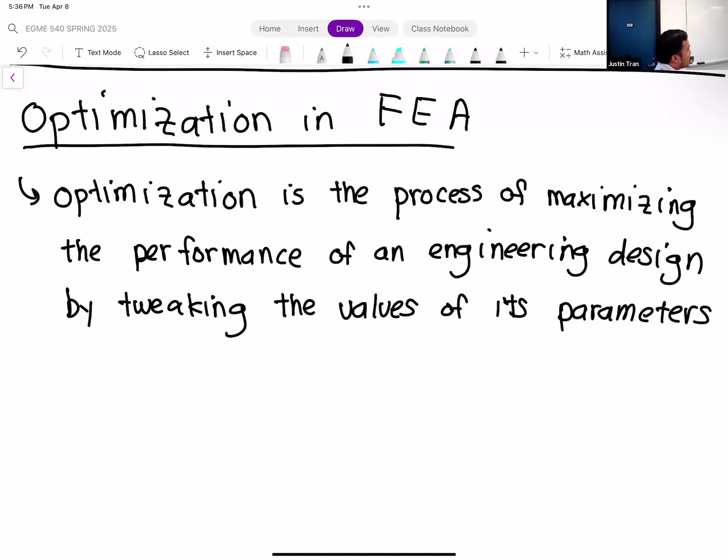Okay, so whenever you have an engineering design, there are lots of different parameters that go into that design itself. For instance, let's look at a building. Whenever you're designing a solid part, the first thing that comes to mind are the dimensions of the part itself: we have the height, the width, and the depth. So that's three parameters that define the geometry of our design.

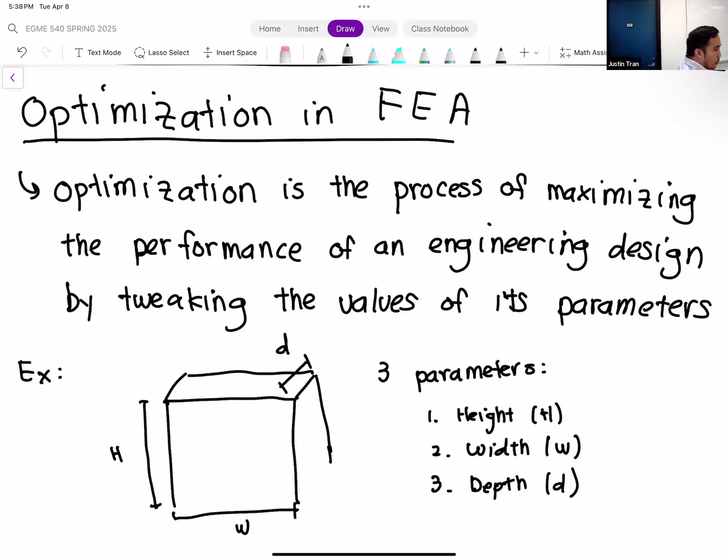Depending on what we specify for those parameters, that's going to change our engineering design. Let's say for this building you want to minimize the amount of air resistance or drag the building experiences in a windstorm. That output, or that aspect of performance, is going to be sensitive to our design parameters. If we're interested in minimizing the drag, or minimizing the energy cost of the building, we would think about changing these three parameters.

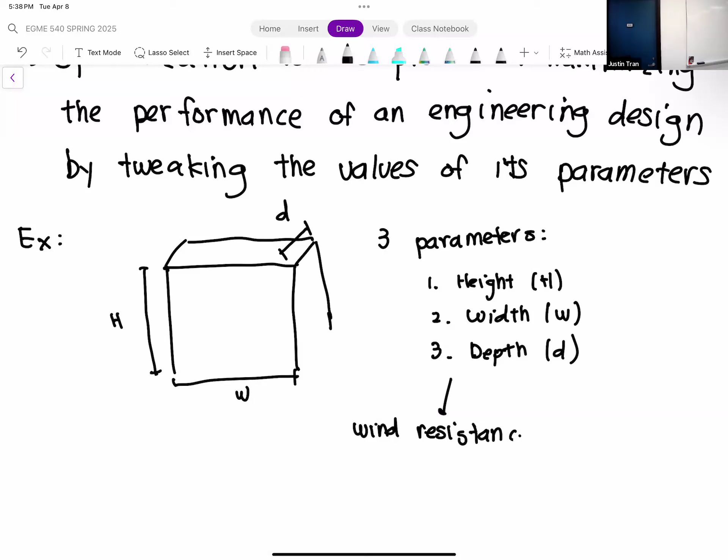So we can tweak the values of these parameters, or change their values, and that's going to change how our design behaves, what the outputs of our analysis are going to be. Another example, one that's a bit more close to home, something we've all done in this class—let's look back at activity 3.

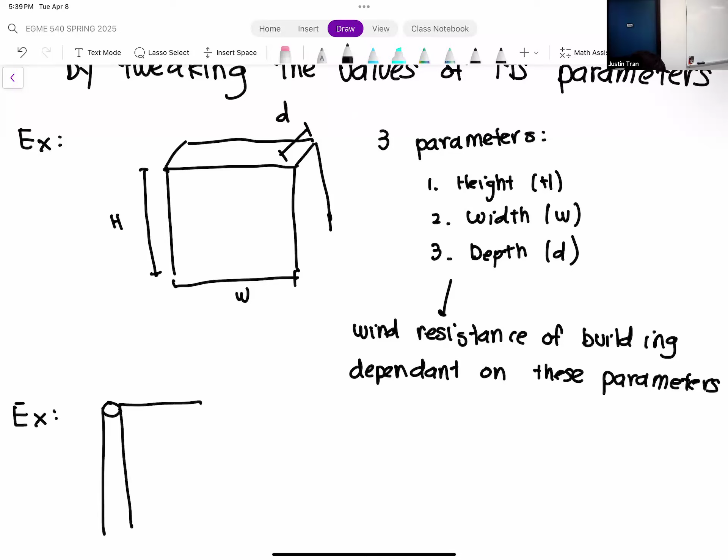In activity 3, we actually did a little bit of a design exercise. If you recall, that was our signpost activity—we had our signposts like this. Part of that activity, I had you modify the diameter of the post so that the stress in the post was minimized, or we tried to get it below the yield strength of the material.

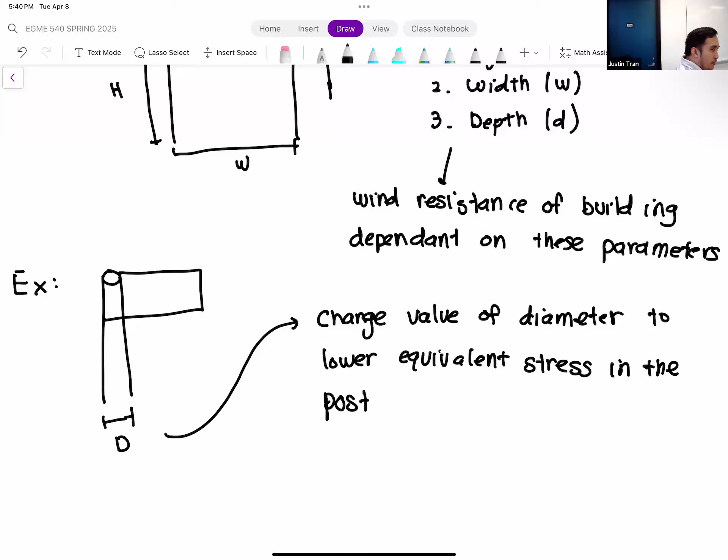Okay, so that's another example of an aspect of our design's performance being sensitive to these parameters. And of course, these are not the only examples. Any engineering design you have, the result or performance or inefficiencies are going to be sensitive to these parameters. A big part of engineering design is how we select these parameters in a way that maximizes performance, minimizes loss, maximizes the factor of safety, things like that. No matter what engineering design you do, that's going to be part of the process at some point.

Now, we haven't really put much thought into how we do this so far in this class. Whenever there's a design aspect to an ANSYS activity, I tell you to just do trial and error: change the parameter, run the simulation, see how it changes things, go back and do it again. Turns out there's a much more intelligent, more efficient way to do these kinds of things, and that's to utilize what's called optimization.

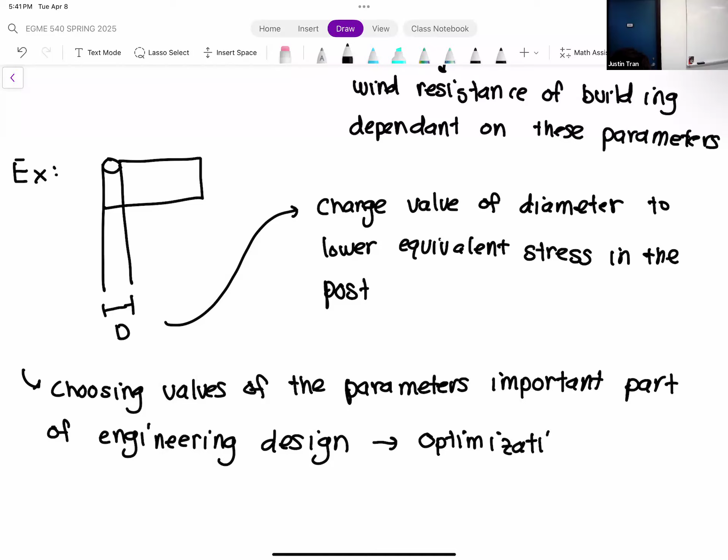The nice thing about optimization is that, for the most part, once you set it up, it's not something you have to babysit or input things into—it's a fully automated process. So optimization essentially automates the process of choosing the values of these design variables or parameters, and choosing the best possible values for them for your design.

So you can see, it's a very powerful tool, and it's one that's utilized in a lot of different settings to get good results. It's especially useful in situations when you have multiple design variables that all interact with each other in very complex ways.

If you look at the signpost example, you could probably design it without optimization because there's only one variable. But what if you have 3 design variables, maybe 4, 5, 6, 7? It becomes a lot more complicated because when you change one variable, it changes the performance of the others in a non-linear way. So for situations with multiple design variables, you need to use optimization to choose their values in an intelligent way.

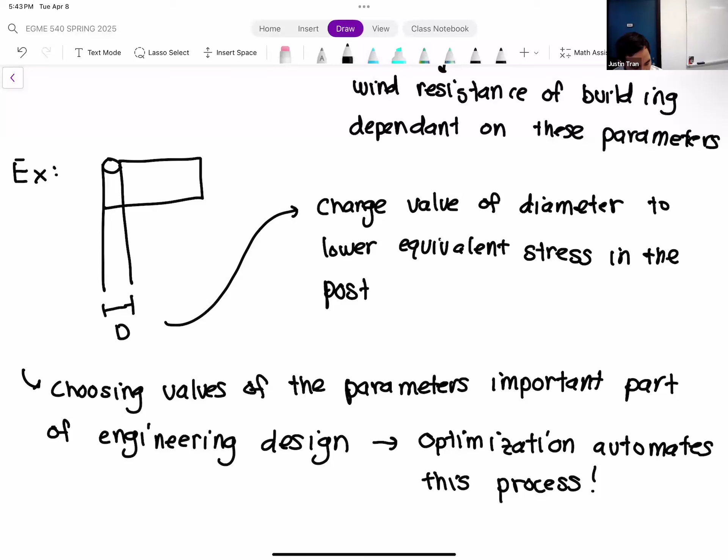So that's the objective, the goal of using optimization: to take this issue of choosing the values of these parameters and do so in an automated, systematic way that utilizes our computer to the fullest.

Any questions on this? Okay.

So let's go over a bit about how optimization works. We're not going to get into the algorithms because that's kind of a whole other class—people who took 454 with me last semester will tell you. But there is some prerequisite information you need to know to at least set it up. So let's go over some of the basics of optimization.

The interesting thing about optimization is that we introduced it in this class as an engineering tool, but optimization doesn't even have its roots within engineering. It's actually an applied math thing. You could argue that engineering is just applied math, and I wouldn't disagree, but specifically optimization started as a math concept before engineers adopted it. In fact, optimization originally didn't have anything to do with anything physical at all.

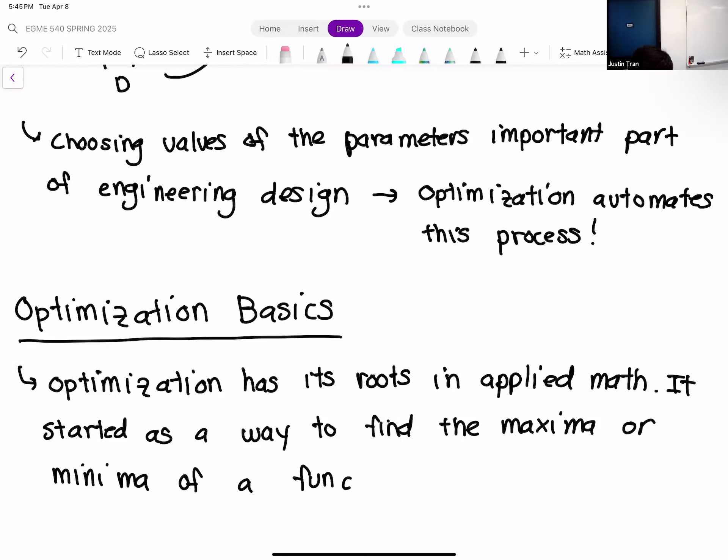So if you have some kind of function—let's say a function of t, with horizontal axis t and vertical axis f of t—if you have a function that looks something like this...

Optimization started as a way of, if you have just any kind of generic function, figuring out first where the maximum is going to be, and what the value of the function at the maximum is going to be. The maximum of this function—you can see the highest value the function attains is at this peak right here.

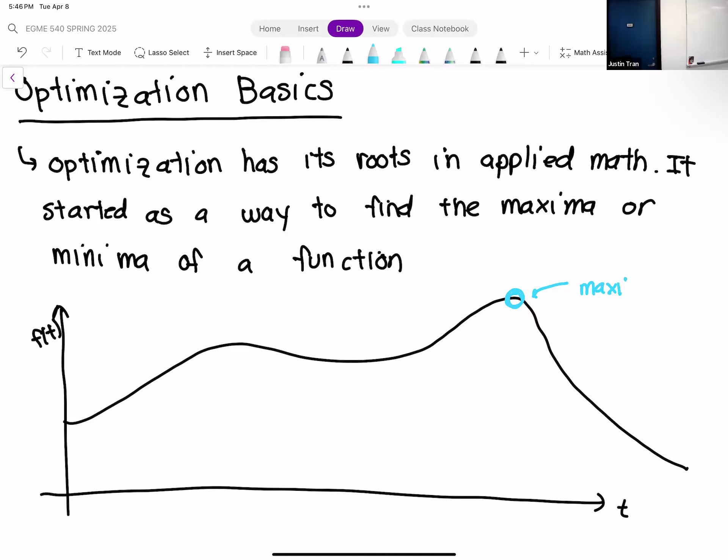And the value of t where the function attains this maxima is right here. So we often call this t optimal.

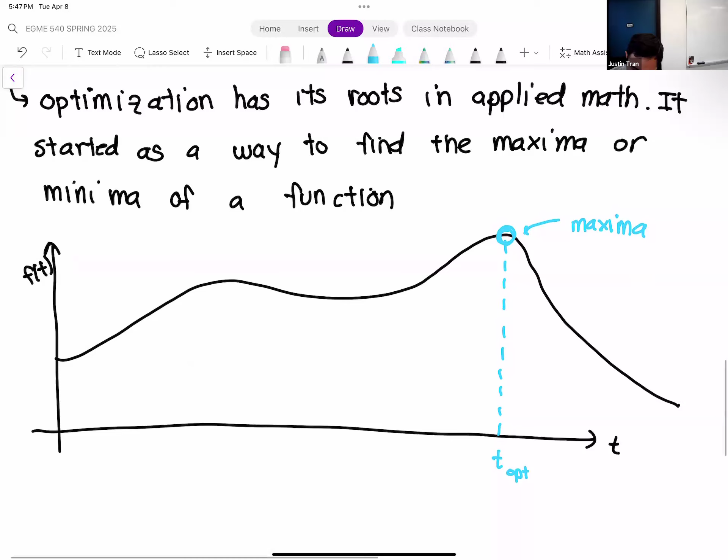So that's how it kind of started. Basically, mathematical algorithms are strategies or ways to take a function and find its maxima in a guaranteed way. Now for a 1D function, it seems kind of silly—for this function here, we found the maxima without needing any fancy algorithm.

But again, when you have multiple variables—let's say a function of 3, 4, or 5 variables—at that point it becomes impossible to plot because you have so many degrees of freedom. In those situations, you need some kind of algorithm to find the maximum.

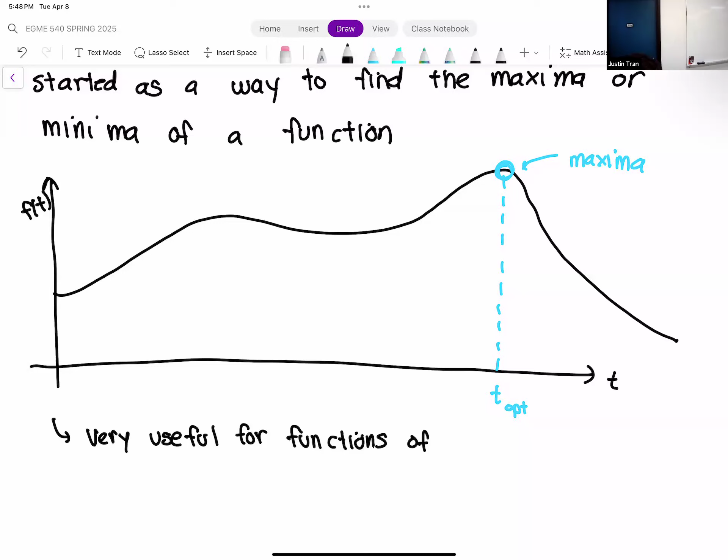As is the case with engineering designs as well. When you have engineering designs that depend on multiple parameters at the same time, finding all of their optimal values simultaneously is challenging without optimization.

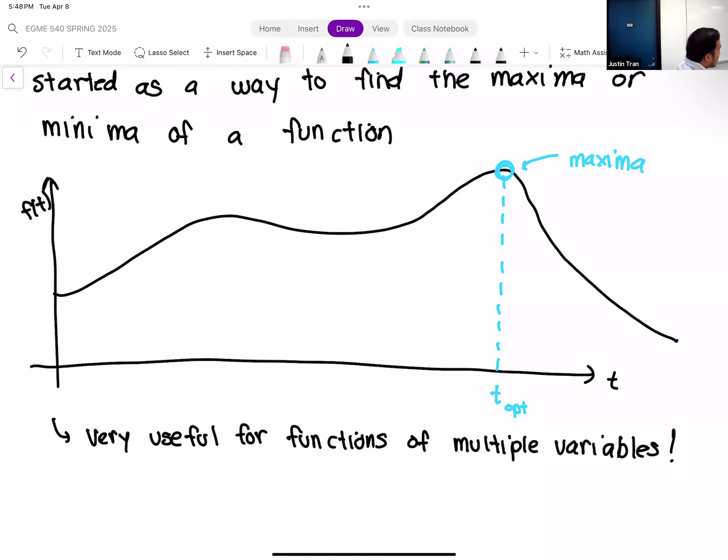Okay, so let's break this apart. Let's define some terminology here based on this simple example that we have.

So the first term that's important to understand with optimization is this idea of a design variable. A design variable is some parameter of your system—of your engineering system, of your mathematical function—that will influence the output or influence the performance of the system in some tangible way.

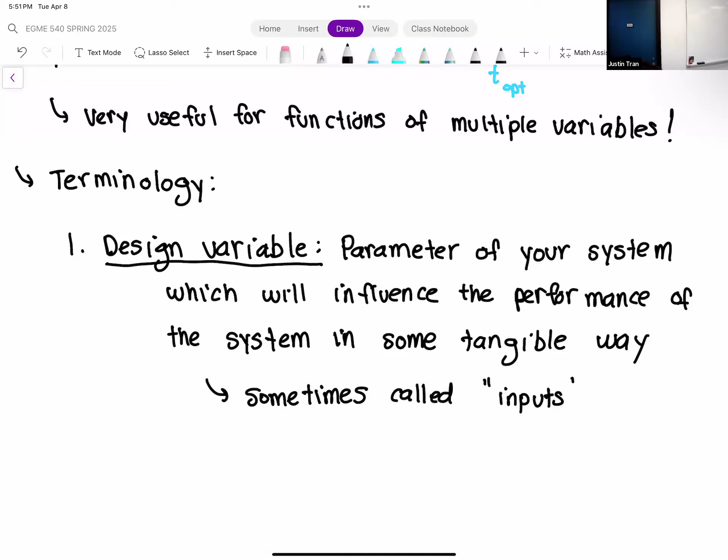Now, if you look at the mathematical literature behind optimization, oftentimes the design variables are called inputs to your system. But in an engineering context, we're often talking about engineering designs, so I like to call them design variables.

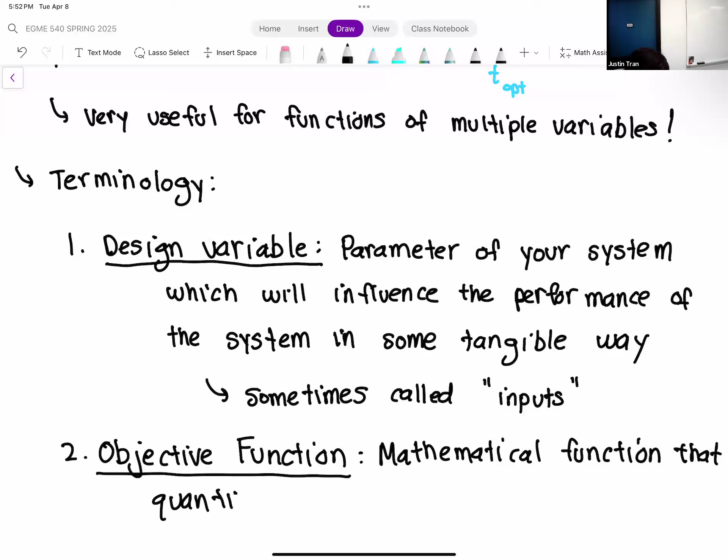Second term that's important to know is what's called the objective function. The objective function is a mathematical way for us to quantify the performance of a given engineering design. Basically, we have to have a way to definitively and systematically state whether one design is more superior than another. And the way that we do that is by computing the objective function.

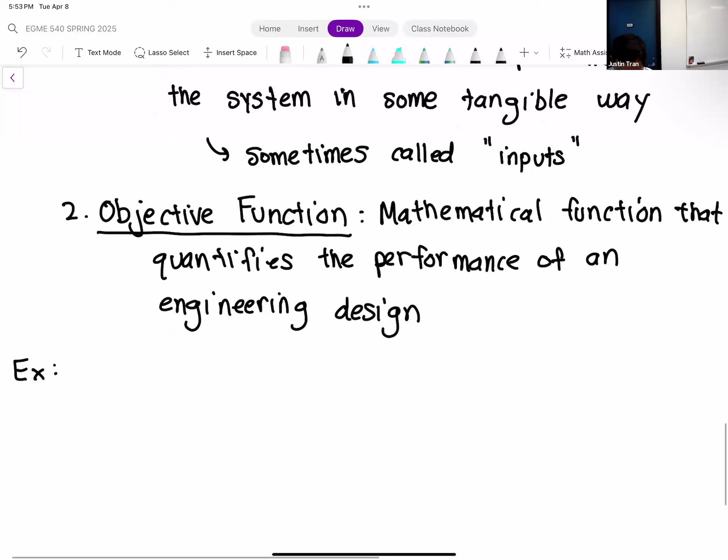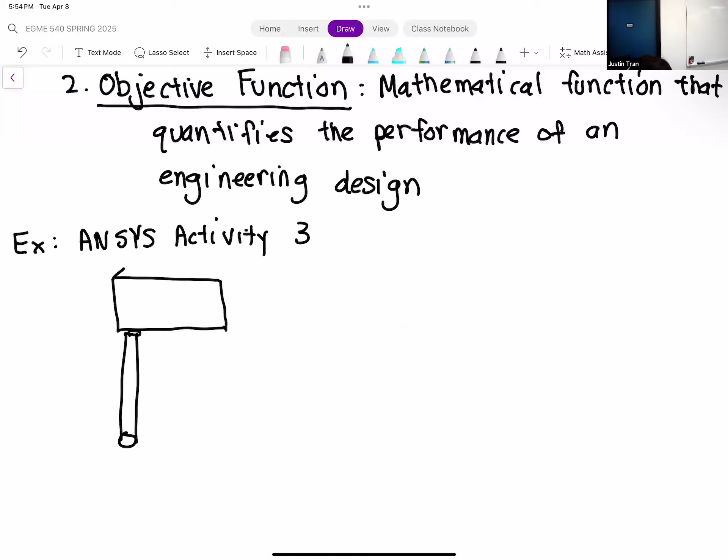Let's do an example here just to illustrate these concepts. Let's once again look at our signpost activity from activity 3. Let me go ahead and draw it again - a little bit of a better drawing of the signpost, although it's a little bit wonky in this case. Part of activity 3 is that I tasked you with choosing an optimal value, or modifying the signpost, so that the equivalent stress in the post falls below a certain factor of safety.

So essentially that was our design problem that we were looking to solve in activity 3. Right away, we can see that we have our design variable here - the variable or the aspect of our design, the parameter of our design that we can change, that we can tweak to affect its performance, is the diameter of the post. So our diameter here, that's going to be our design variable. It's just one in this case, but we can have more design variables, of course.

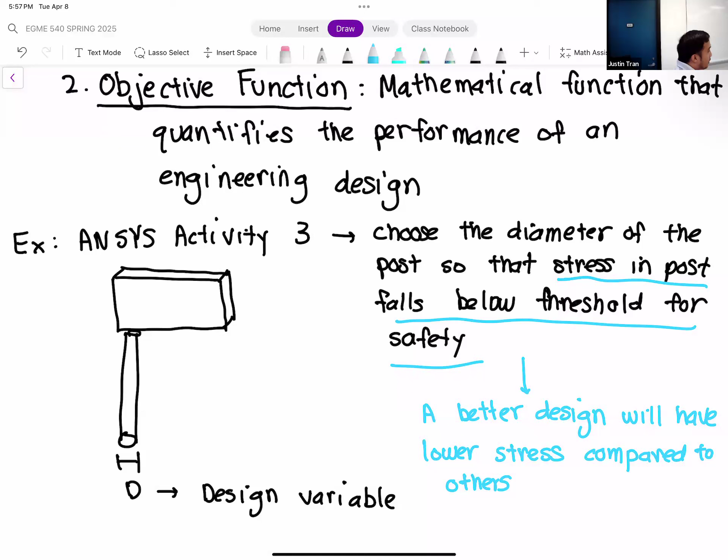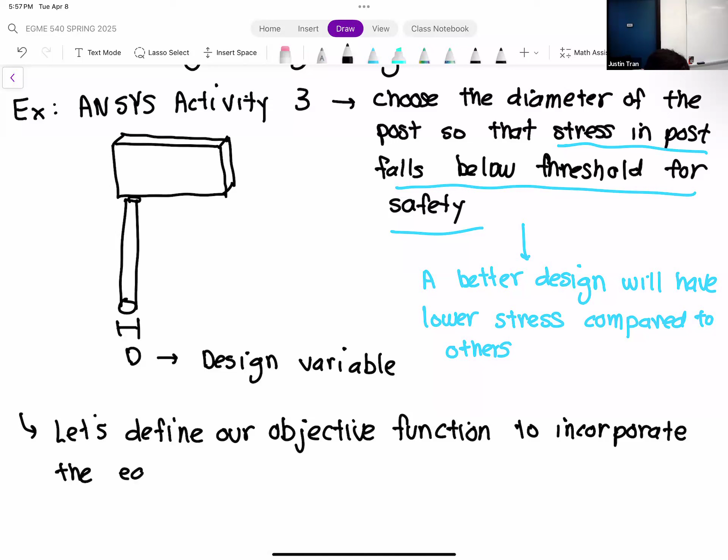And so if we're comparing two designs head to head, the design that has a lower equivalent stress in the post compared to the other one, that's going to be the more superior design. Our objective function basically needs to reflect this. So one way that we can design our objective function is to incorporate that equivalent stress directly into our objective. If equivalent stress is the criteria that we're going to use to quantify or rate our designs as better or worse, then that factor should be in our objective function.

So our objective function, let me give it the very distinct symbol F - I know we use F for a lot of things in engineering. Our objective function here, in this case, is going to be a function of the post diameter. This is going to be equal to minus the equivalent stress. Let me just give it a symbol - minus sigma von Mises, where sigma von Mises here, this is our equivalent stress.

What we can basically say is that the performance of our design is inversely proportional to the equivalent stress of the structure. So basically, the higher the equivalent stress, the more negative this function is going to be. That means the worse design it's going to be.

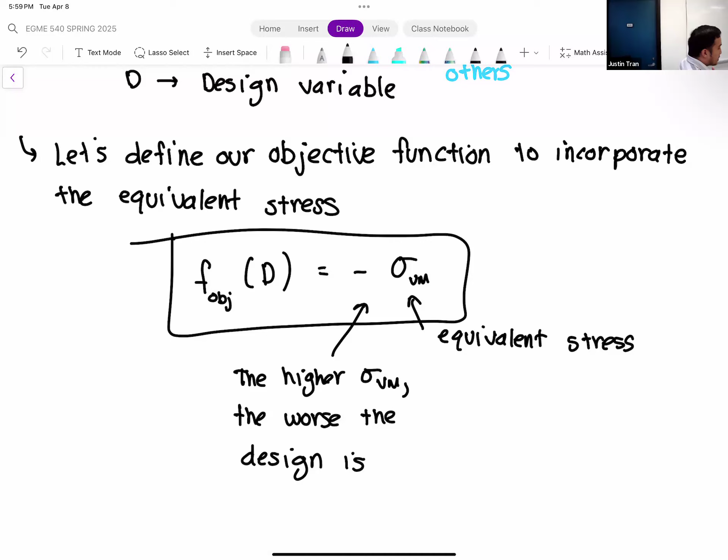So if we want to maximize the performance or maximize the objective function of our design, we want to minimize the equivalent stress. Okay. Now, this is not the only definition for the objective function that works. The definition of the objective function is usually something that you can change and modify. Another way to get a very similar result is if we define our objective function to be 1 divided by the equivalent stress. So that would also give the same result.

So if you have a lower equivalent stress, that's going to lead to a higher value of the objective function. So you want to maximize that as much as possible. Okay. So the objective function for any given problem is not unique. In fact, modifying it and tweaking it in certain ways will give you certain results better than others. Okay, so that's the idea.

And so for any given optimization problem or any given design problem, you first need to identify what your design variables are going to be. So what are the aspects of your design that you can actually change to affect the results? And then the second thing you need to think about is, how am I going to quantify the performance of my design? So what factors or what quantities are going to go into my objective?

All right, any questions on this? Okay, good.

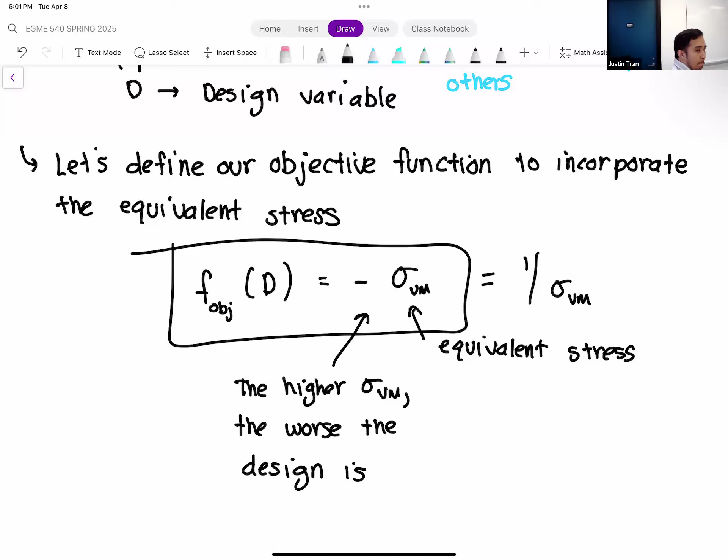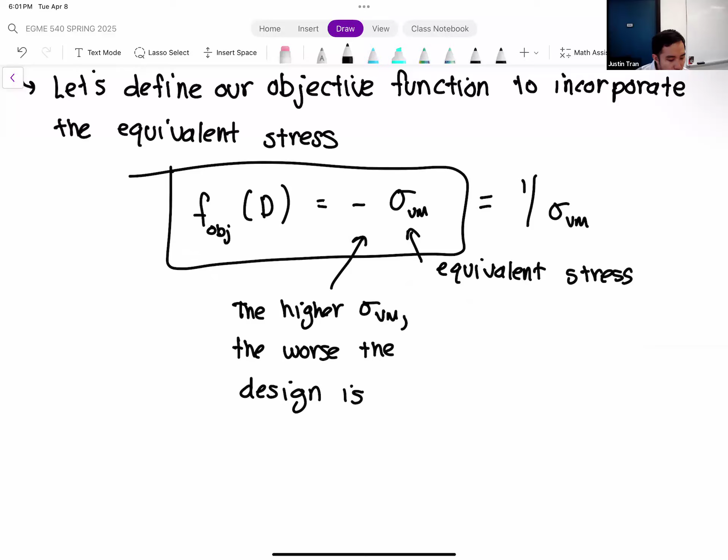All right. So that's just a very basic example of how to take a design problem and put it in terms of the optimization terminology. Okay, let's talk about the objective function a bit more, because that definitely warrants some further discussion. So like I mentioned above, the objective function is your way to quantify what constitutes a good design versus a bad design.

So when you're forming your objective function, you need to think about what are the most important aspects of my design that are going to make it into the objective function. Now, for a finite element based engineering design, most of the time your objective function is going to consist of certain aspects of your FEA simulation results.

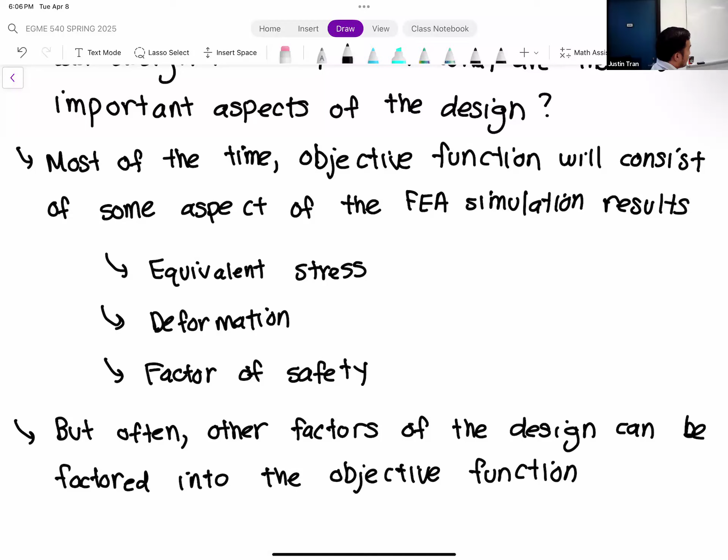Because if you base your optimization purely on the equivalent stress, you can come up with a design that can minimize the equivalent stress. I'm pretty confident that you can do that in any given situation. But oftentimes, you're going to end up with a geometry that's way too big, way too bulky. That's going to be either impossible to manufacture or way too expensive to manufacture.

So oftentimes, other things that you may consider would be the total weight of the design. If you're doing any kind of application with aerospace, the weight of the payload or the weight of your craft is going to be very important. And so you need to balance the weight together with some of the other simulation results.

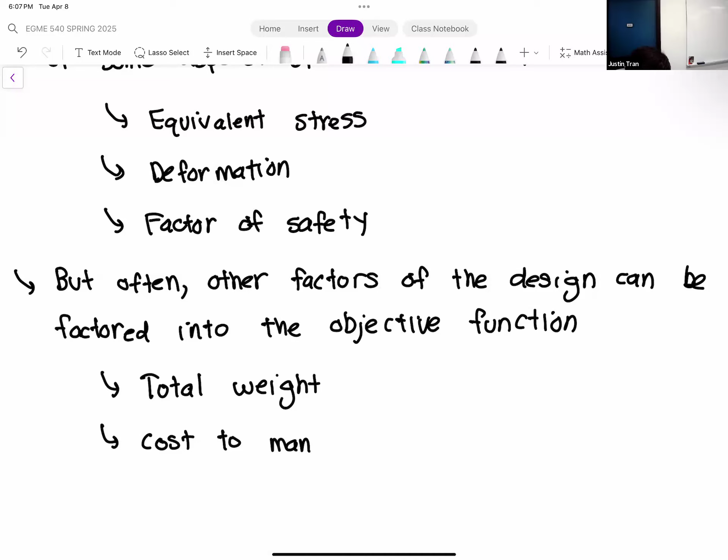Another very common one is the cost that's needed to manufacture. On the one hand, this could be just the total volume that your part takes up, and so that's just directly material cost. A part that takes up 1 cubic meter is going to be more expensive to manufacture than something that takes 0.1 cubic meters. It's just a material cost.

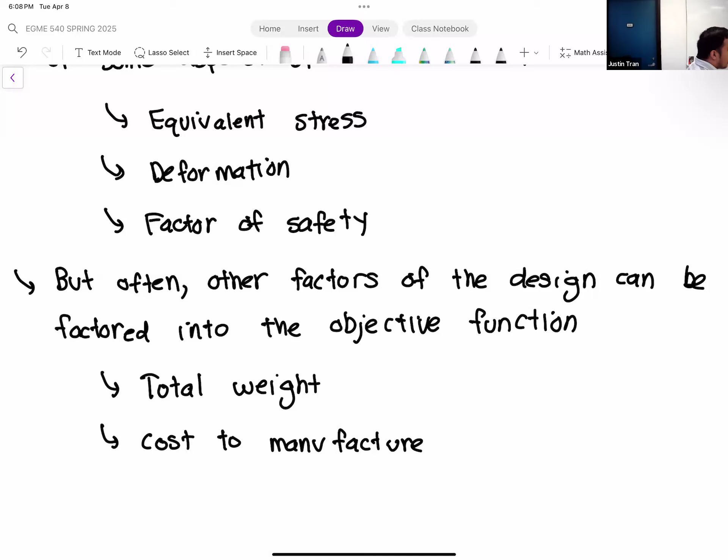But it could also be the cost it takes to manufacture a certain type of geometry. There's a certain aspect of your geometry that's going to be more difficult or require another process to produce. That's something that you need to factor into your objective function as well. Maybe that additional process will lead to a better stress behavior, but you have to weigh the pros and cons of whether that cost is going to be worth it for the benefit that you get. Okay.

So all of these factors you probably know already. You're all grad students in engineering, so you know that all of these factors are important considering engineering design. When you make your objective function, it's more about how do you take all these different complex objectives, complex ideas, and put it into a mathematical form that the algorithm can understand.

And don't be afraid to do multiple objectives as well. In fact, most optimizations you're going to have multiple objectives. I know in the previous example we just looked at the equivalent stress, but oftentimes you're going to have more than one aspect to consider. That's what makes optimization interesting, that you can consider multiple different objectives and try to balance all of them together into one design.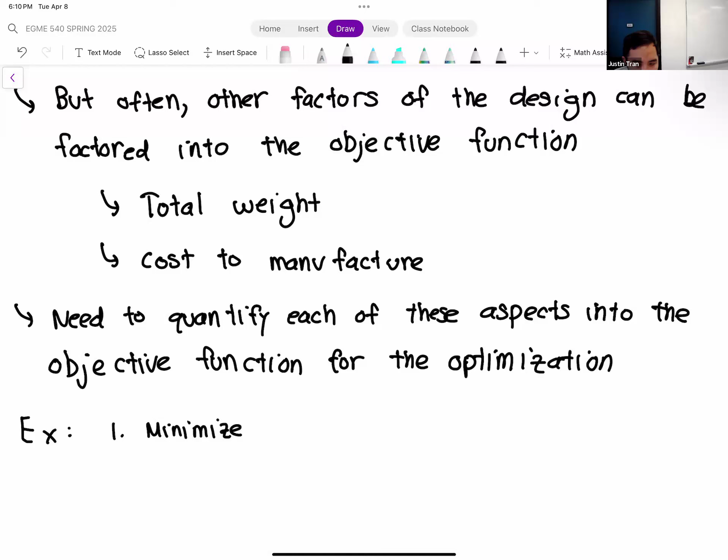So for example, for the activity that we're going to do on Thursday, we're going to base our optimization primarily on 2 objectives. One objective is that we want to minimize the total deformation of the part. Right, so we want our part to be sufficiently strong and sufficiently safe, and so we want to minimize that deformation.

But at the same time, this part that we're gonna be doing is eventually going to be manufactured. So we have to minimize the cost of production as well. That means minimizing the weight, minimizing the material cost. That's most of what we're gonna consider on Thursday, just minimizing the material cost.

What's interesting is that these two objectives are actually at odds with each other. What you're gonna see on Thursday is that to minimize the total deformation, the program is gonna want to add more material, because adding more material, more mass, increases the total stiffness of the part. That's gonna minimize the deformation. But when you add more material, that also increases the cost. So these two are almost directly competing factors.

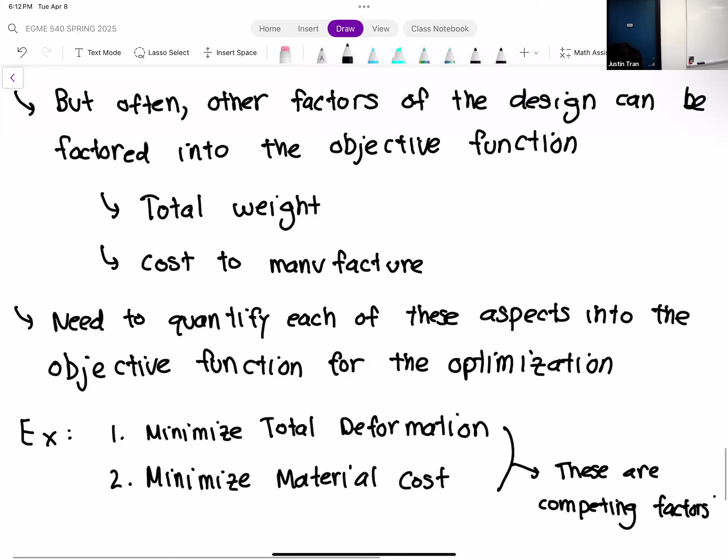It's going to be very interesting to see on Thursday how ANSYS is going to navigate this and choose an optimal design. And that's a case you're going to run into a lot when you're doing these optimization problems. All right, any questions on this so far?

Okay, so let's talk about one last aspect of optimization that is really important, which are constraints. Now, I know we've used the term constraints for boundary conditions here in the class, but these are different kinds of constraints. These are not constraints on your physical FEA simulation, but constraints on the optimization procedure itself. So just to be clear, I'm going to call these optimization constraints. Okay.

Now constraints, one way that you can think of an optimization is that when you choose your objective function, how you choose to formulate your objective function is going to influence the optimal values of your design variables, right?

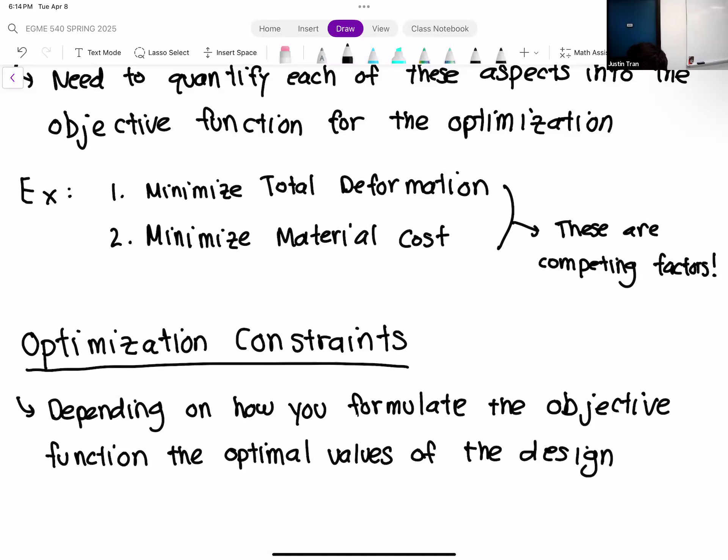Because remember, the objective function basically tells us how we value or how we quantify different aspects of the results of our finite element simulation. Okay, so for example, we go back to the previous example where we're considering the deformation and the cost of our part. Okay.

So one way that we can form our objective function is, let's say that we want to place more weight on our cost, right? So our objective function is 3 times cost plus deformation. And let's say that we want to minimize this. Right, and so in this situation, because we have the coefficient of 3 in front of the cost, that's gonna influence our design variables much more than the deformation.

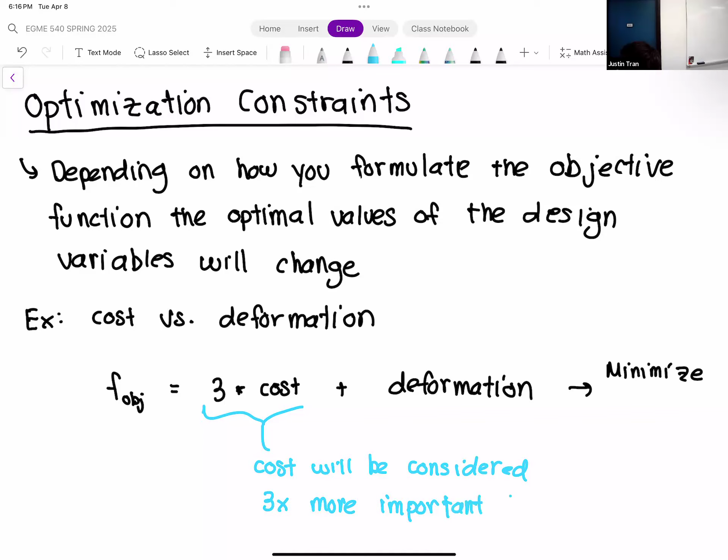And so maybe we're gonna opt for a design that's much leaner, so it has much smaller physical dimensions than before. And of course, it goes the other way as well. If you instead put a coefficient of, let's say 5 in front of the deformation, then our design is gonna opt for maybe a thicker, more material, more mass kind of design. Okay. So how we choose our objective function is going to influence our design variables.

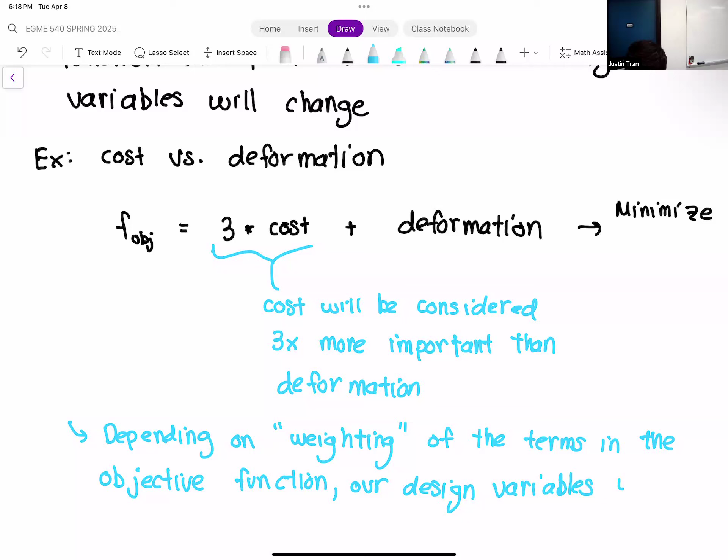And depending on which aspects of your design or which aspects of the outputs are more important, you can reflect that in the objective function. Okay. And so oftentimes, when you do optimization, it's very much an iterative process. You'll run an optimization, you'll look at the results, you'll think, oh, maybe that's not quite what I'm looking for, maybe I want to minimize the cost a bit more. Then you can play around with the weightings to change that result. Okay.

But this relationship between the objective function and the design variables, I would say is a bit more of an indirect relationship, okay? Oftentimes, when you have an engineering design problem, there are hard constraints or hard limits to what you can do with the design that you can't violate no matter what.

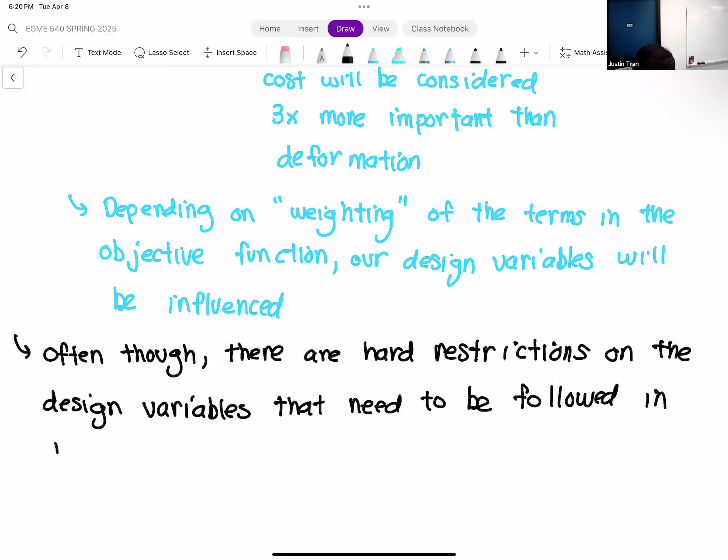Right, so I think the most obvious example of this is making sure that your design fits within a certain space, a certain volume. Okay, because the way optimization works, and you'll see this more closely on Thursday, is that optimization will take each of your design variables and almost randomize it in a certain way, or choose their values somewhat randomly, and run a simulation and see how the results turn out. And so if there are hard restrictions or hard constraints that you want to impose on your engineering design, you need to explicitly define that within the algorithm itself.

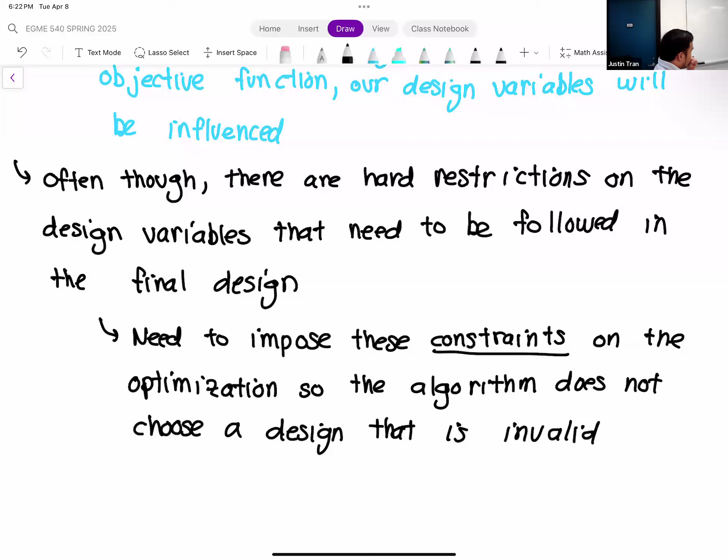Okay. So let's look at the example that we're continuing on with this class. If our objective function is defined as it is above here, where we have a 3 times weighting on cost, we may come up with a design that optimizes the cost 3 times more than the deformation, okay? So let's say that the optimizer has chosen a design that minimizes the cost of production. It also tried to minimize the deformation, but it didn't concern itself with it too much because the cost was the main driver, the main output that we were trying to optimize.

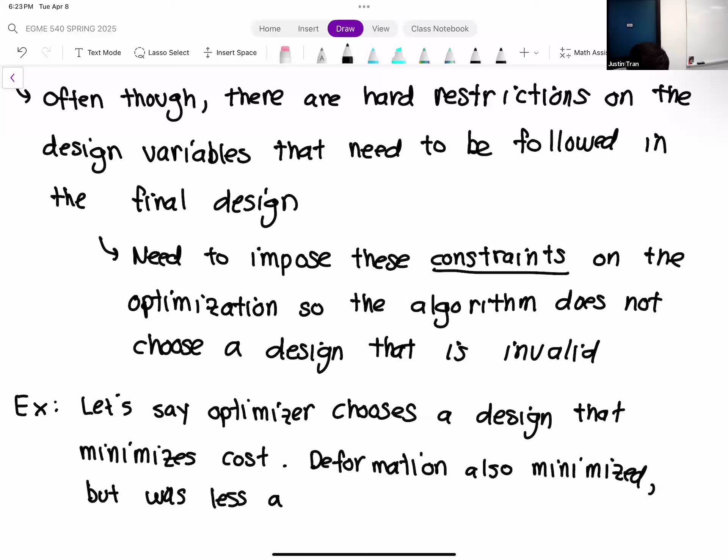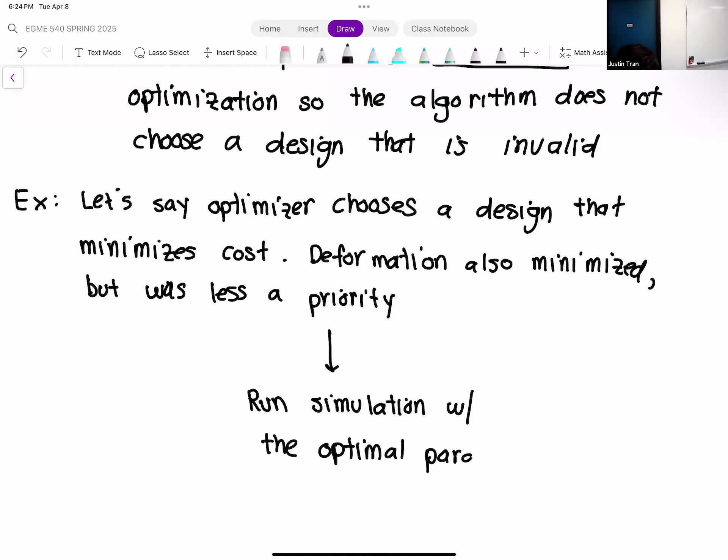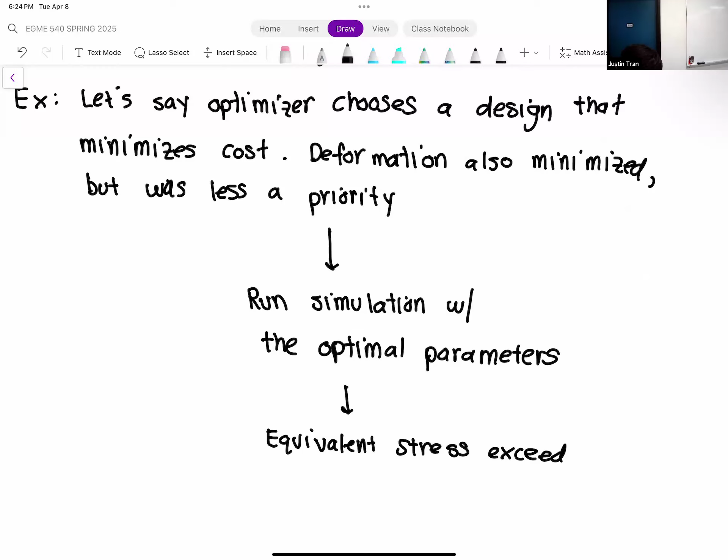Okay, so we ran the optimization on our design. Let's say we had 3 design variables, and we found one which minimized the cost as much as possible. Let's say that we took those parameters and we run a simulation with those optimal parameters, just to look at our design and see how it's performing. And what we see from the simulation results is that the equivalent stress exceeds the yield strength of the material. Okay?

Just bad, right? So if you have a design and you load the design in a very typical way and your equivalent stress exceeds the yield strength, then your part is simply gonna break, it's simply gonna fail. Okay. And so even though we were successful in minimizing the cost, obviously this design is invalid because the equivalent stress is too high. Now, we need to go back and modify our design so that the equivalent stress meets this criteria. One way that we can do it is that we can take the equivalent stress and include it in our objective function.

Right, so that's one way that we modify our process in order to account for that, but it doesn't solve our problem for good, right? Because even though we can add the equivalent stress in there, because we're emphasizing the cost so highly, even if the equivalent stress were put into our objective function, there's no guarantee that our result will still be below the yield strength.

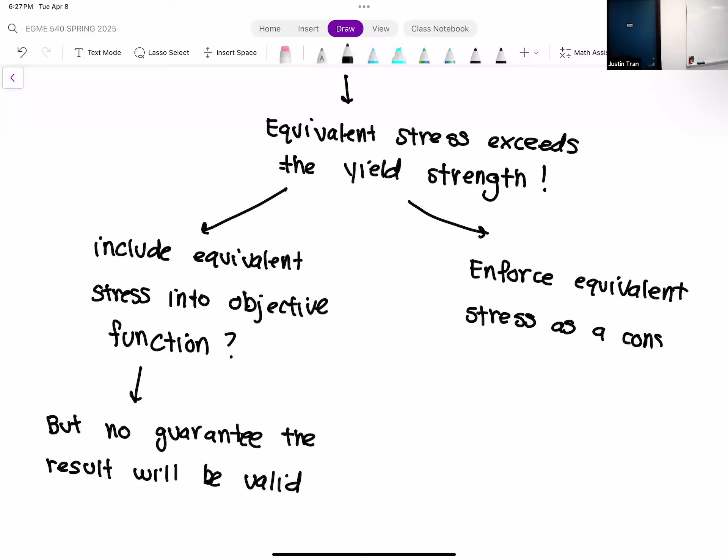So people often get constraints and the objective function mixed up because sometimes they can do the same thing. But the difference is that an aspect you put in a constraint is forced to be satisfied. It's forced to be followed. Kind of like how a constraint is in your finite element simulation. So that's something that has to be done, okay? So for a situation like this, where it's necessary for a valid design to have an equivalent stress that's less than the yield strength, I would incorporate this as a constraint versus part of the objective.

So that's essentially what a constraint does. A constraint is a mathematical way to force your optimization algorithm to get certain parts of your results, okay? And so this is one example. I think this is actually what we're gonna do on Thursday, where we're gonna basically force our design to make sure that our equivalent stress is less than the yield strength, okay?

But there's other things that you often want to constrain as well. Oftentimes, you want to constrain the admissible parameter values for the different design variables, so you don't want it to go below a certain threshold or above a certain threshold. Or maybe there's some aspects of the cost where you don't want the cost to exceed a certain amount as well. Okay? So when you have these hard restrictions, things where you can't cross the line for your engineering design, you need to enforce those as constraints. So the definition is constraints are conditions...

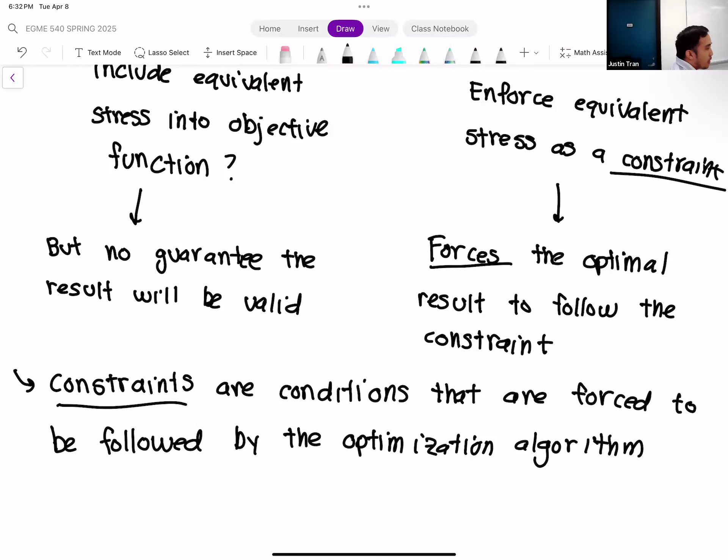Granted, the computer is going to be mostly handling this optimization process for you. But it's still good to understand what the computer's doing, so that you're not just wondering what the computer's thinking about for a good 20 minutes sometimes.

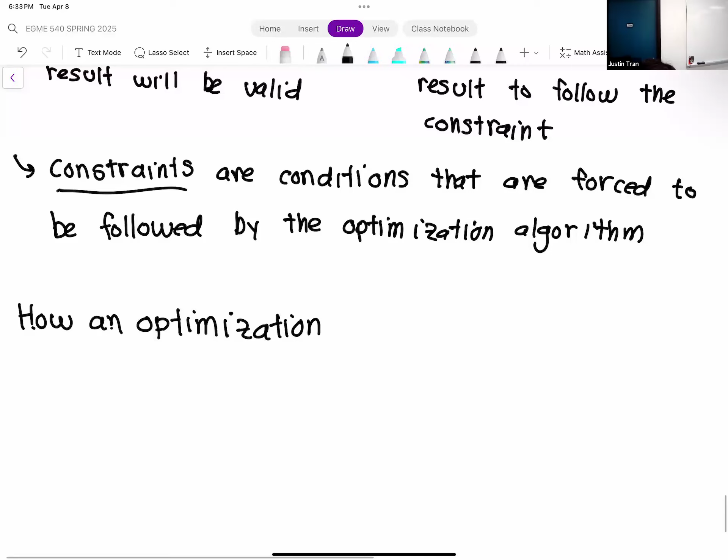Okay. So remember, the goal of an optimization is to choose the best values of the design variables to either maximize the performance of your design or minimize the bad aspects of your design.

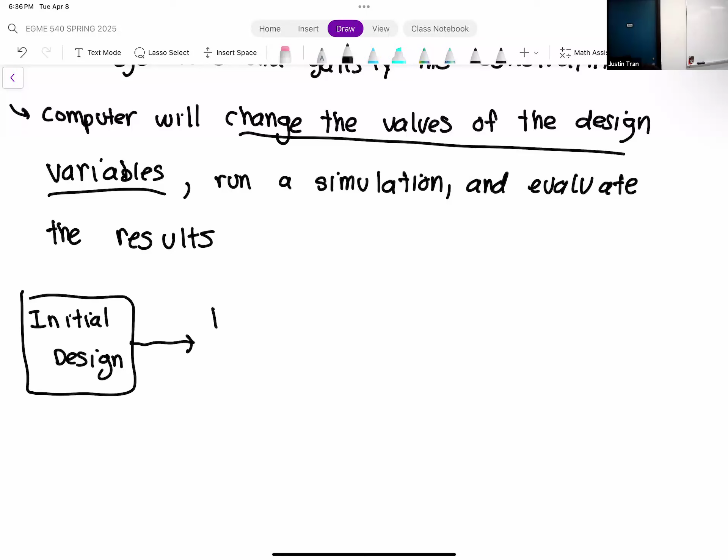So just based on the initial values of your design variables, you can run a simulation and see how it performs, okay? Now, the next thing you want to do after you run your simulation is make sure that all of the constraints are satisfied.

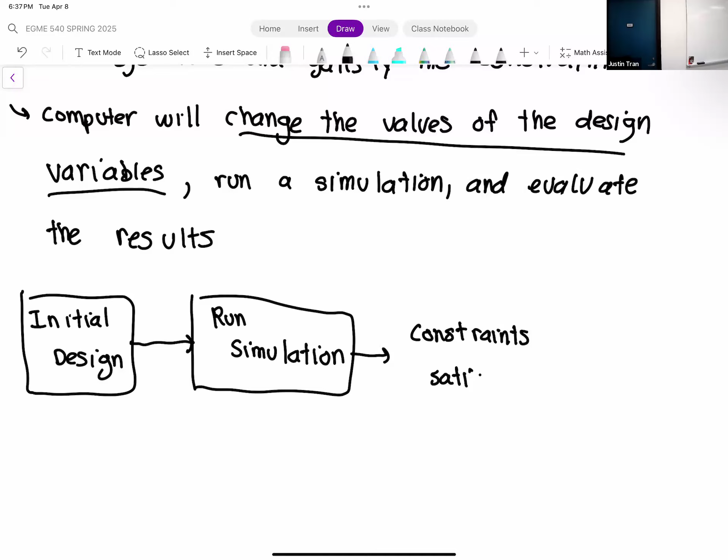You'll be surprised, sometimes even in your initial design, your constraints may not be satisfied. You may have designed a part that's gonna break from the get-go, okay? If the constraints are not satisfied, we have a no. So let's say that your initial design is poor and your constraints are not satisfied. What you're gonna wanna do is change the values of the design variables.

Right, so you're gonna modify the values of the design variables, run the simulation again, and then check to make sure that your constraints are satisfied, okay? Well, let's say your constraints are satisfied. Say our constraints are satisfied, yes.

And so from here, what you're gonna do is evaluate your objective function. And once you've evaluated your objective function, you'll have a number or an evaluation in terms of how good your design is, okay?

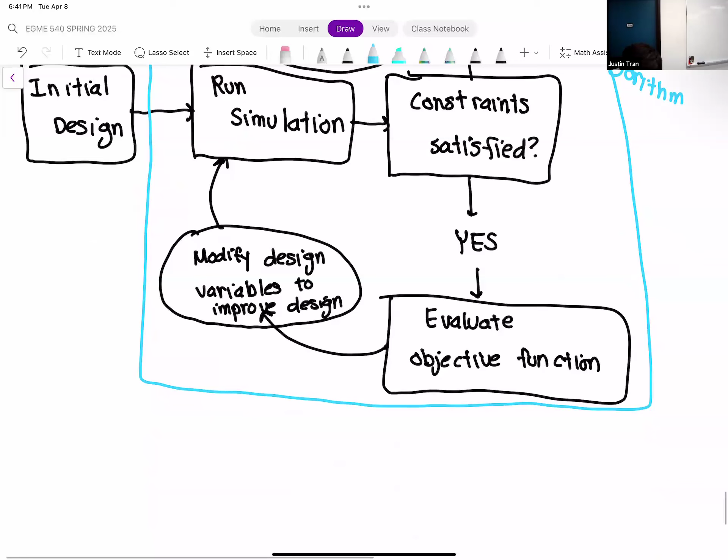Running a simulation, seeing how things go. If things improve, that's great. If they don't, then you just modify and go on to the next one. And all throughout this process, the software is keeping track, building this table of all the different design variables and how they performed in the simulation.

Every time you run a simulation, it's going to remember whether it satisfies the constraints or not, and what the value of the objective function is going to be. When the algorithm is done, it's going to choose the best combination of design variables that first of all satisfy the constraints, and second of all led to the best value of the objective function.

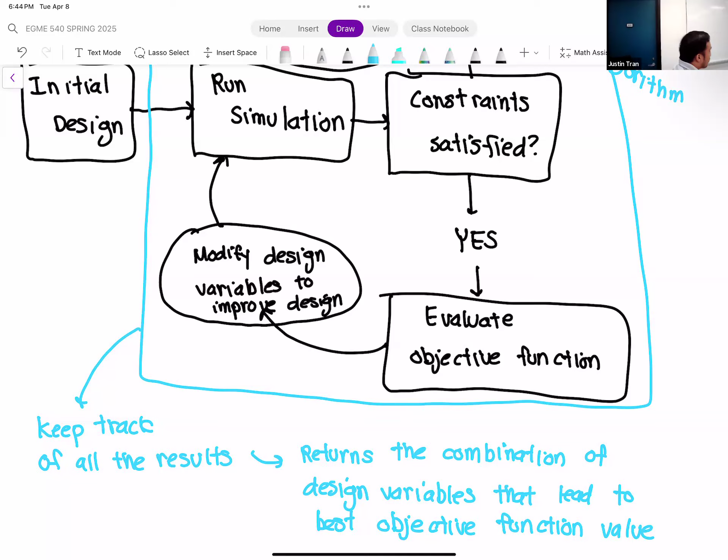Now it's not a random process. I think the biggest mystery boxes are the ones I've circled - how the algorithm chooses to modify your design variables, how it chooses the next values. There's a lot of math to that, and anyone that took 454 last semester will tell you there's a lot of complications with that step. But we're not going to go over that in this class because there's just not enough time. Essentially that's how these optimization algorithms work, and what you're going to observe from the outside perspective.

All right, any final questions before we wrap it up? Yes. How does it know when to stop?

Yeah, so there's a lot of different criteria you can use to stop. One way, or probably the most common way, is that you can tell it a maximum number of simulations to do - say, don't do more than 100 simulations. And it'll find just the best value out of those 100 you choose.

Another way it stops is that maybe it finds a combination of design variables that is really optimal, and no matter how it chooses to change, it doesn't find anything better. So if it finds a spot that's really good, and tries 10 other simulations within that vicinity that none of them lead to an improvement, then that's another indication the optimization algorithm has converged, and then it can stop.

But most commonly, you're going to hit that maximum simulation limit, just because these problems are often too complex to fit that convergence criteria. Any other questions?